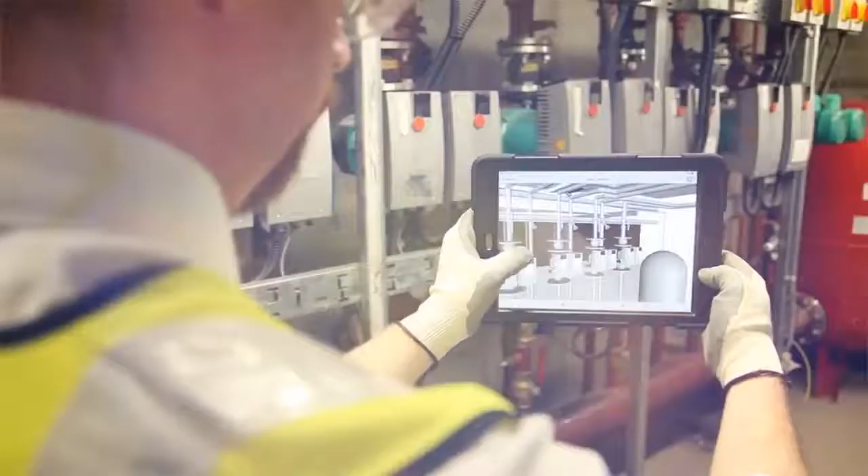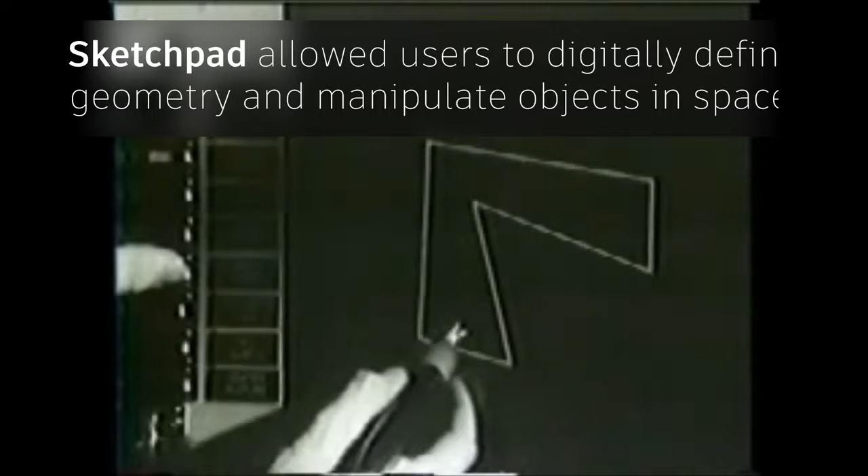As early as the 1960s, computer pioneers realized the demand for flexible, digital building models. The breakthrough came in 1963 when Ivan Sutherland developed Sketchpad. This rudimentary application allowed users to define geometry and manipulate objects in space with only the help of an electronic stylus on a computer screen.

However, these early predecessors built models without data on functional performance characteristics, meaning that without information on how buildings work, they were rather superficial implementations.

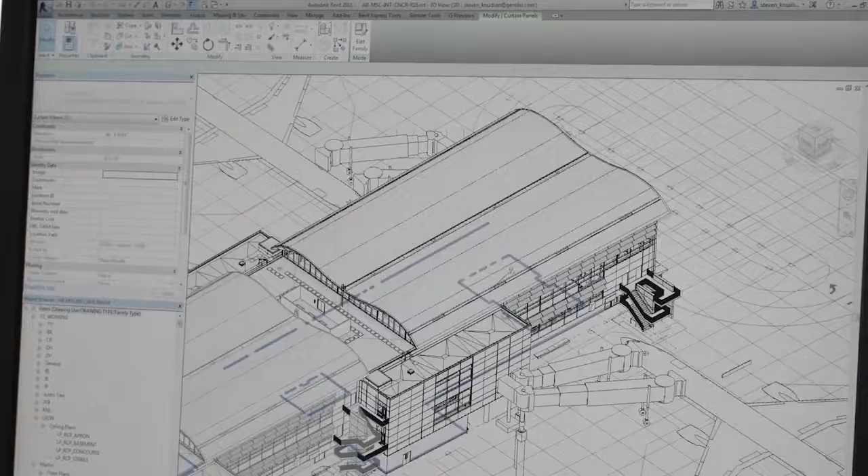In 1984, these BIM forerunners became available for use on personal computers, but it wasn't until 1986, when Robert Aish coined the phrase building modeling, that early programs were first used on large and complex projects, such as the renovation of a Heathrow Airport terminal.

In 1993, the Lawrence Berkeley National Lab's development of Building Design Advisor paved the way for systems providing performance data on how buildings and their components function.

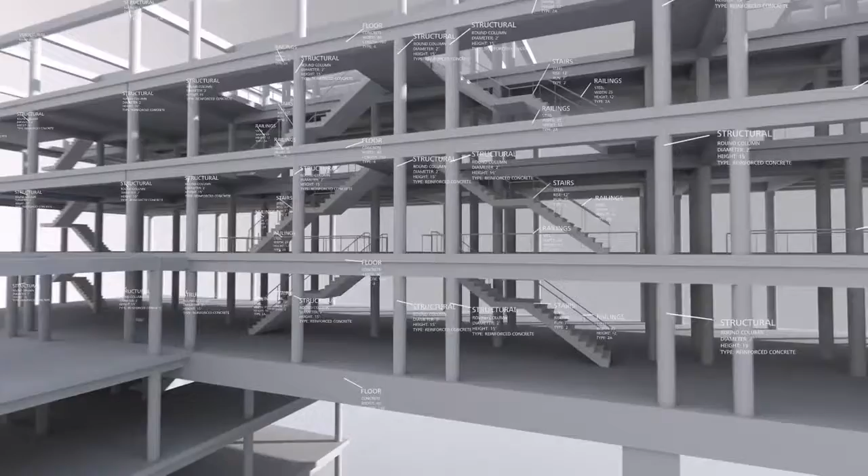By the late 1990s and early 2000s, the contemporary outline of BIM had started to crystallize. Objects and shapes had fully embedded metadata and were able to understand their relationship with each other and the building as a whole. 2004 was a huge year for BIM.

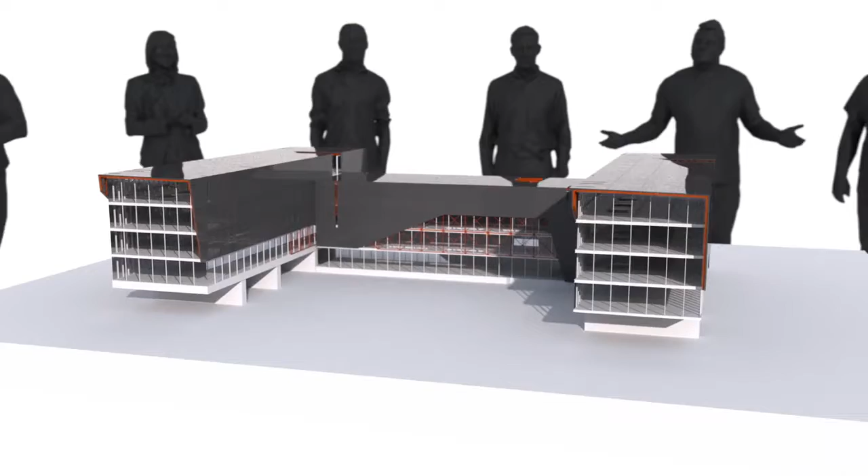For the first time, designers, builders, engineers, and owners could all work collaboratively on one centralized, dynamically updated model. For example, if a designer made a change to the model, the project's construction shopping list automatically changed too, such as the number and size of windows.

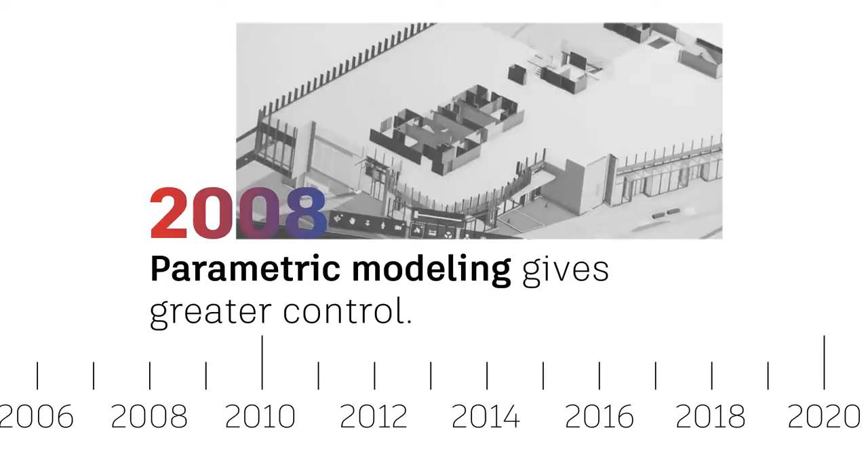In 2008, four years later, parametric modeling also took a step forward, with an avalanche of design outputs, giving users even greater control over their project decisions.

Meanwhile, laser scanning and reality capture filled BIM models with precise, abundant data, saving time in project preparations, and clash detection made it possible to automatically locate on-site clashes, such as ductwork running through beams, and prevent expensive change orders.

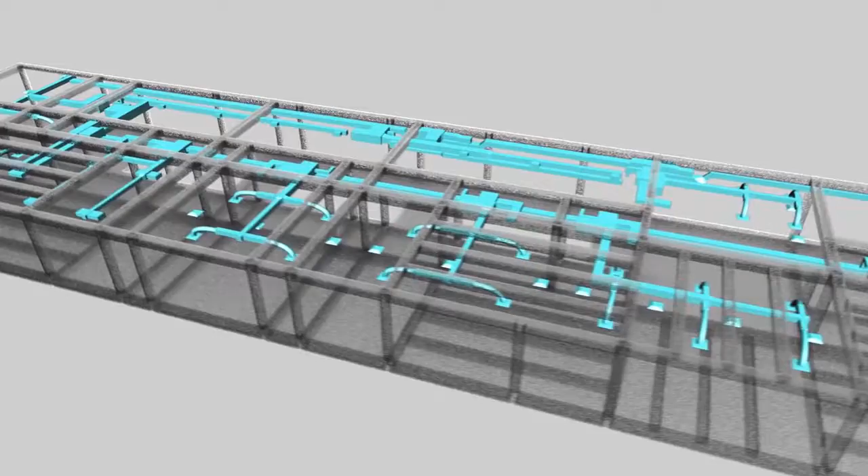With help from clash detection, engineers for the China Zun Tower in Beijing caught thousands of issues in the BIM model. It reduced passive change orders by 80% compared to other similar projects.

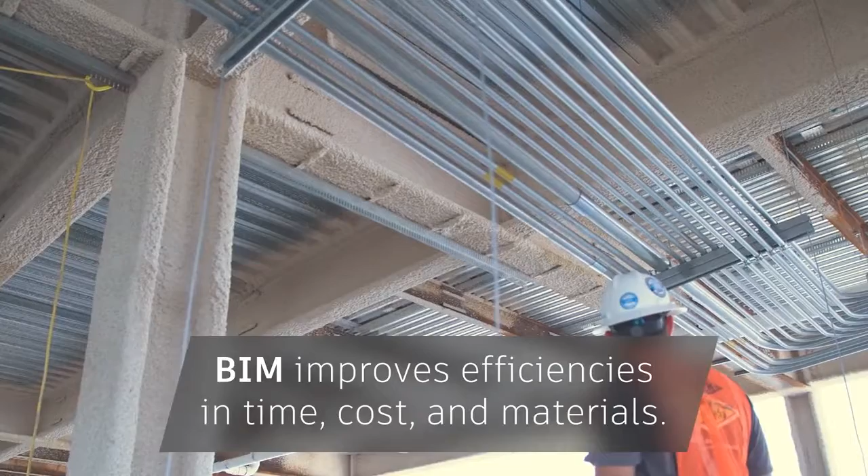The indisputable efficiencies in time, material, and cost driven by BIM meant that in 2016, the UK became the leader in legally mandating that all public-funded building projects must use BIM, and other countries are soon following suit. By 2020, Germany is mandating BIM for all transportation projects.

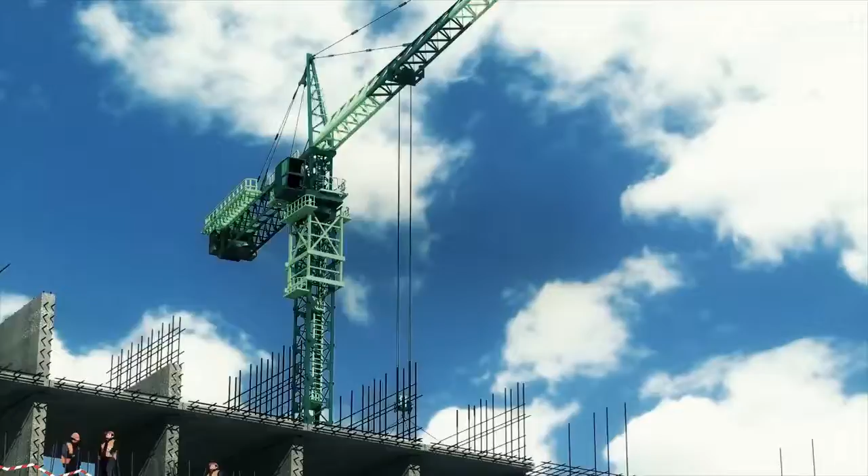With BIM now in the cloud, teams can collaborate on the same model from all over the world, providing great efficiencies. In the near future, BIM and GIS data will merge into one model, helping designers make crucial decisions based on the precise geographic location.

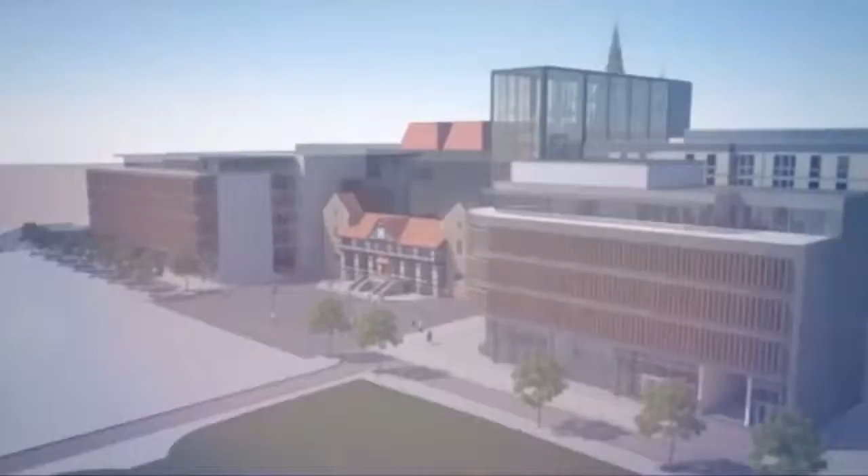As 3D modeling technology advances and is more commercially accessible, the BIM process is becoming more and more integrated with building the wider world, promising a richer, more collaborative experience for users designing and building the spaces we live and work in.